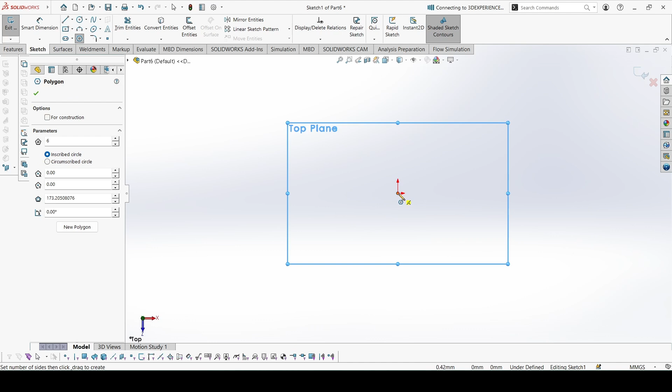Top plane, select polygon of 6 sides. This is 4, and to constrain it, select one edge and make horizontal. Now go to extrude.

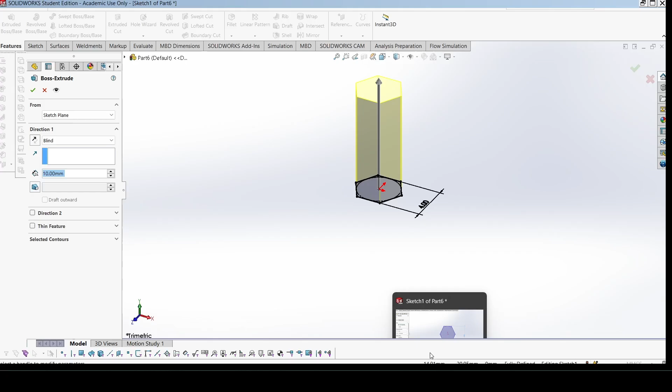This extrusion, it is given 4, but we also have to consider this fillet because this extrusion would be up to this edge. So 4 plus 1 is 5. Make this 5 mm. Now sketch here another polygon.

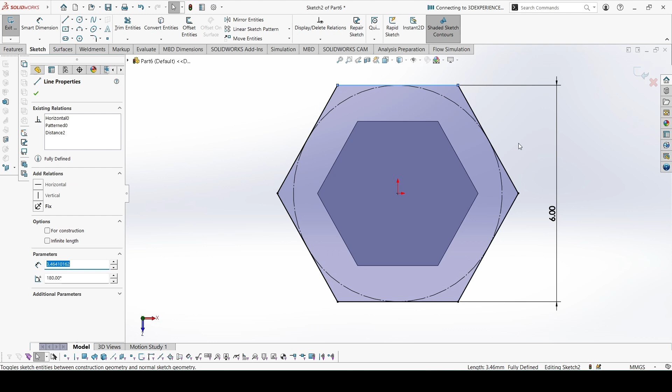This is 6. To constrain it, make one edge horizontal. Again extrude. This would be 17 minus 5 because total is 17. This is done. Now we can add the fillets of 1 mm.

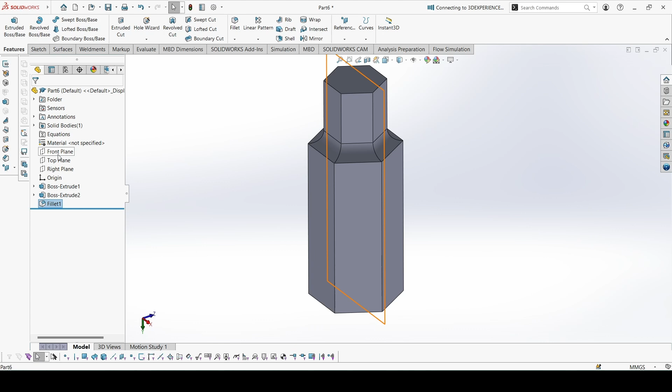Select one edge, and from here you can select the complete loop of 6 edges. Enter. Now we will sketch on this front plane the contours that we need to revolve cut.

So it would be a triangle here. This distance is given 1, and this angle would be 45. Another triangle. This is given 0.5, and again the angle is 45.

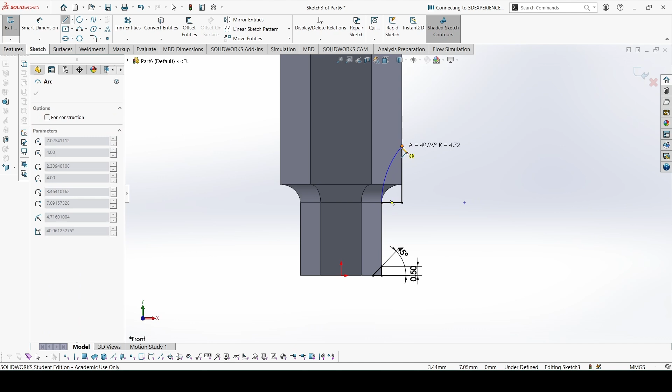Now finally this is 4.5. It's constrained. Everything is constrained. Now to revolve cut we need a center line. Now select everything by pressing Ctrl A.

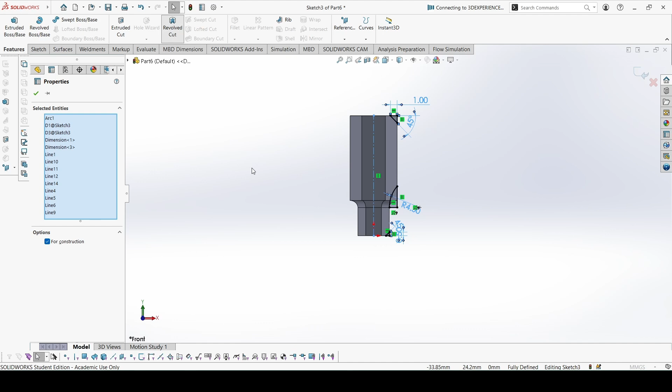Go to features, revolve cut. It will automatically take all the contours and the axes because you selected before going to the revolve cut. Okay, the part is complete. Now we can add the material.

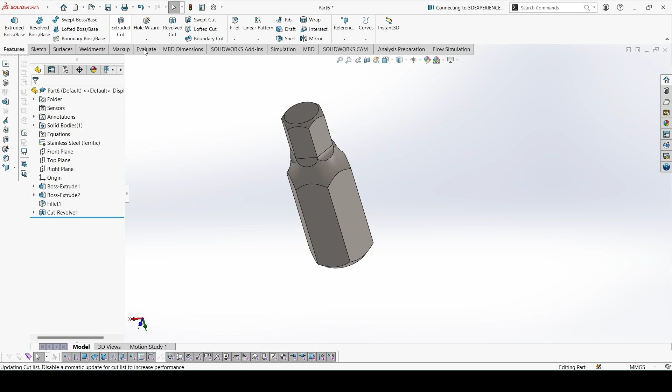This is stainless steel ferritic. Here, apply. Let's check the mass. 3.33 and 3.33. So the answer is correct. Next part in the next video.